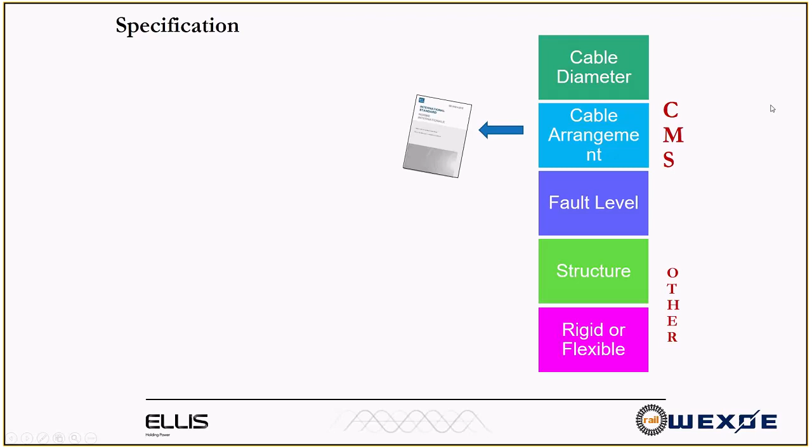So that's everything to do with the cable and what the cable attaches to, but also the environment. The environment is also very important. Is it going to be a marine environment? Are the cleats going to be exposed to sunlight? Is there a fire hazard? Are they going to be on an offshore structure, in a corrosive railway tunnel? Knowing the type of environment is also very, very important for specifying the correct material when you're looking at cleats. If we can get as much information as we can on that sort of slide, then hopefully that will lead to good specification, the project will run smoothly, and when the cleats arrive on site, they'll be exactly what the project engineers are looking for.

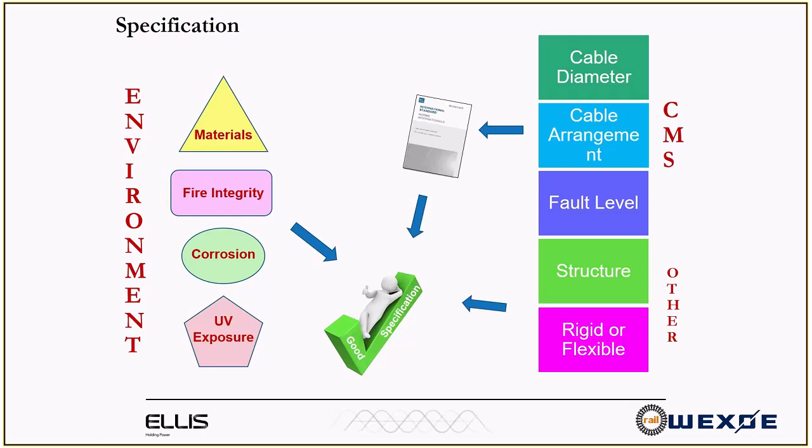Okay, on this slide here, you can see the IEC 61914 standard that I've placed in the middle there, and that relates specifically to the design of that product. However, lots of other things have to be taken into account when designing a cleat. I've briefly mentioned materials and corrosion, UV exposure, fire integrity, and I do realise that all of the numbers there relate to British standards, but there'll be a lot of other international codes and standards that relate into that as well.

So it's not just the product design, the metalwork, there's also the environmental issues that you have to take account of. I'm not going to go through each of these in a lot of detail because there's a time constraint, but I'm going to just give you an example of how corrosion and material selection is important, particularly in the rail sector.

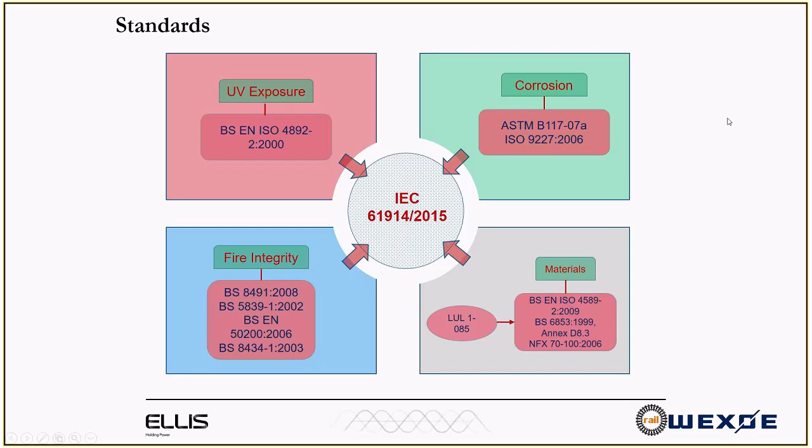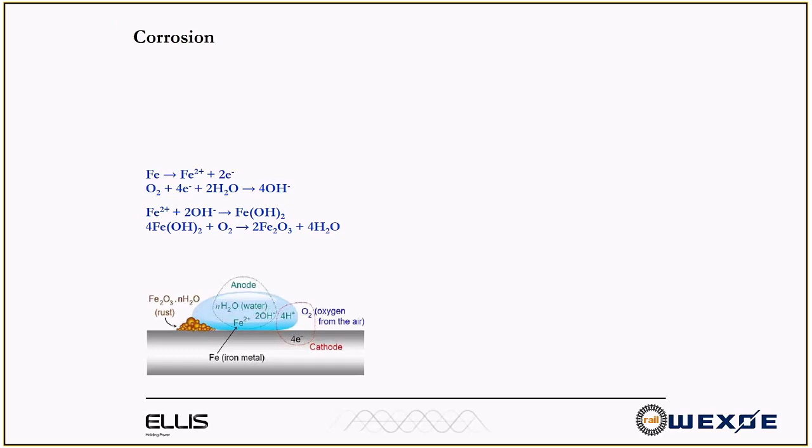You can see here I've put down the chemical formula, the chemical pathways for rust. This is iron 2 forming into what's called iron 3 oxide. So everybody's aware what rust looks like, and you may have experienced that on industrial sites such as oil and gas petrochemical refineries, there are hundreds and hundreds of kilometres of cables and cable management systems, cable containment, lots of steel work. A lot of it is galvanised, a lot of it might be stainless, but in certain conditions it will all be prone to the atmosphere and eventually to rusting, to formation of that iron 3 oxide.

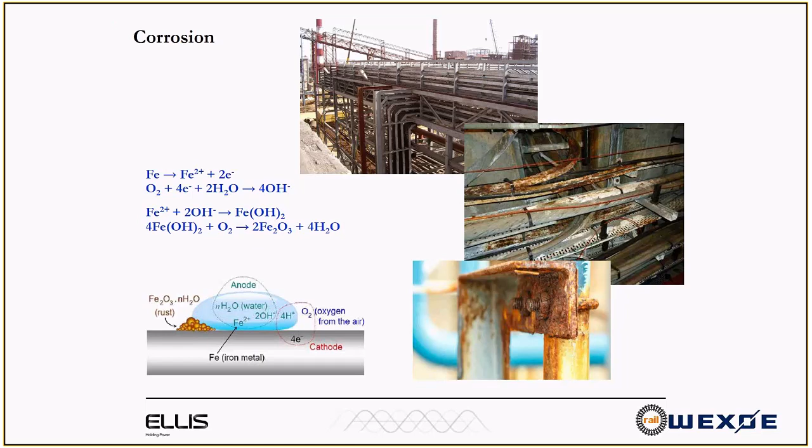So, another type of corrosion that you may be familiar with is what we call bimetallic or galvanic corrosion. This is where you have two metals that are dissimilar, and because of their position on what's called the electrochemical series, their level of activity, they can cause corrosion between the metals when they're in the presence of what's called an electrolyte, and generally that just means moisture or water.

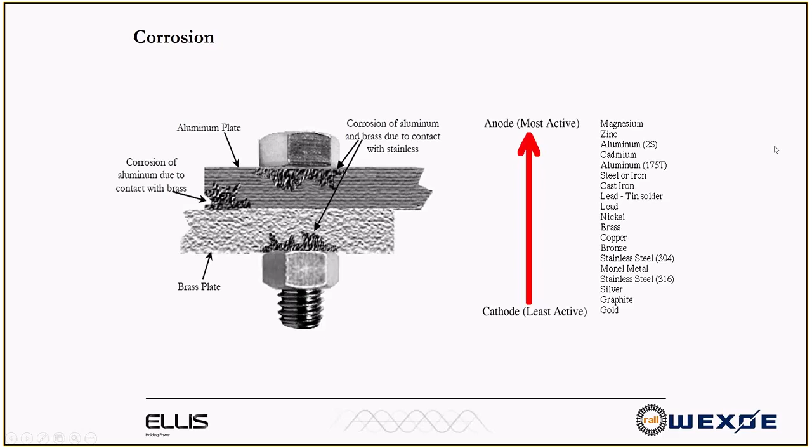So the further apart they are on this scale here, the more likelihood there is of corrosion between them in the presence of water. Here we've got brass and we've got aluminium. Aluminium's there, brass is down here, a reasonable gap, so there's likely to be corrosion. Here we've got stainless steel with brass, or with aluminium, an even bigger gap. So please be aware, with certain metals in contact with each other, corrosion can occur.

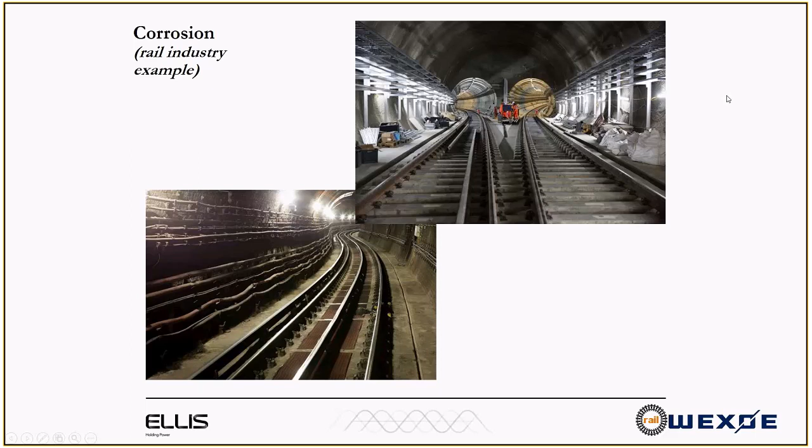So you might think in a tunnel environment that stainless steel would be a good option because it would last for a long time, it would be good at combating corrosive atmospheres, but you might be mistaken. And my point is, you have to take account of galvanic corrosion in railway tunnels. Train braking systems, when trains apply their brakes, the brake discs and the brake construction is generally made of cast iron or a fairly basic iron material. And when the brake shoes push onto those, you get a lot of iron dust into the atmosphere. And that iron dust will eventually settle onto a stainless steel surface.

So if you look where these sit in the electrochemical series, iron, cast iron around here, stainless steel here, there's a fairly big gap, and obviously railway tunnels are prone to moisture and water ingress, and therefore you're going to get accelerated corrosion. So in railway tunnels, try to avoid stainless steel and try to use powder-coated aluminium, which is probably the best. Powder-coated aluminium with cast iron, a very small gap, reduces the exposure to corrosion.

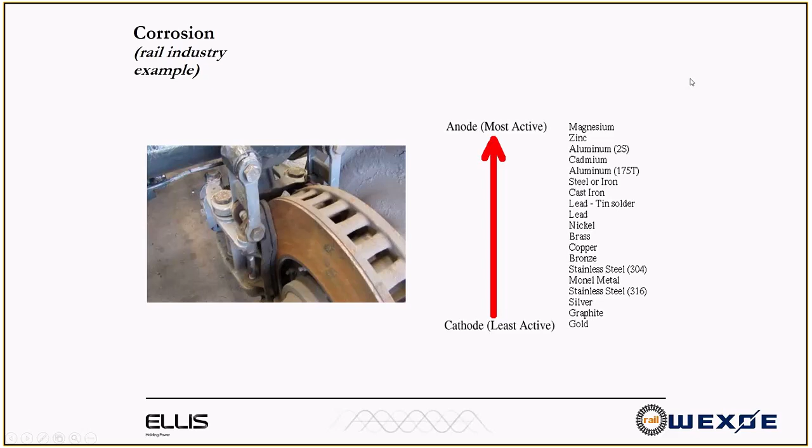Okay, I'm going to talk for 5 minutes or so about short-circuit testing and short-circuit fault levels, etc. This is why cleats come into their own. I said at the outset that cleats weren't very sexy, they don't do very much, but when short circuits arise, this is where the cleat and the strength of the cleat is very, very important. Short circuits occur for lots of reasons. It can be poor installation, it can be weather conditions, but more often than not, it comes down to human error.

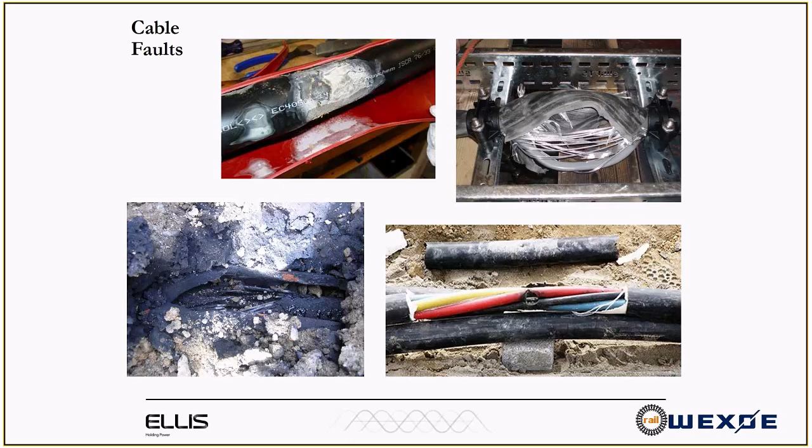This one on the left is what we call a catastrophic incident. So this is a three-phase cable, 11 kV, very heavily loaded, and this was a hydraulic digger. The backhoe of a hydraulic machine that went through this caused a very large noise and a big crater in the ground, so a very serious incident. But largely it comes down to human error.

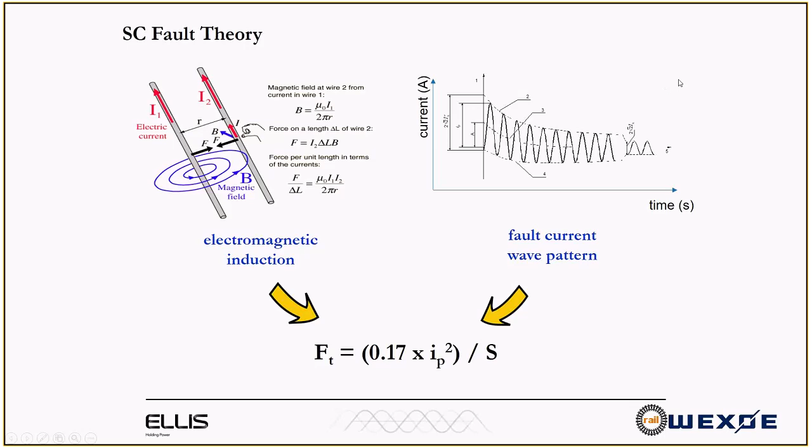And this diagram on the top right is a sinusoidal AC waveform, but just after a large fault has occurred. Normally it would be flat, like it is here, but in this case there's a very large jump in the peak current. Normally the peak current is √2 times the RMS current value. In this case it's about 70% higher, about 2.1 or 2.2 times RMS. So a much higher Ip value, and please note how these relate to this expression here. I've got some video clips that are coming along, and hopefully you'll be able to see how this formula relates to the video clips.

I've got three examples of three-phase electrical systems. Unfortunately, we can't do this sort of testing in the UK anymore, and we have to travel to the Netherlands, to Germany, to the Czech Republic or the US to carry out these tests. They're very expensive. They can be 10 or 12,000 euros per day, but we're a small company and we've so far carried out over 450, so we have quite a large database of information.

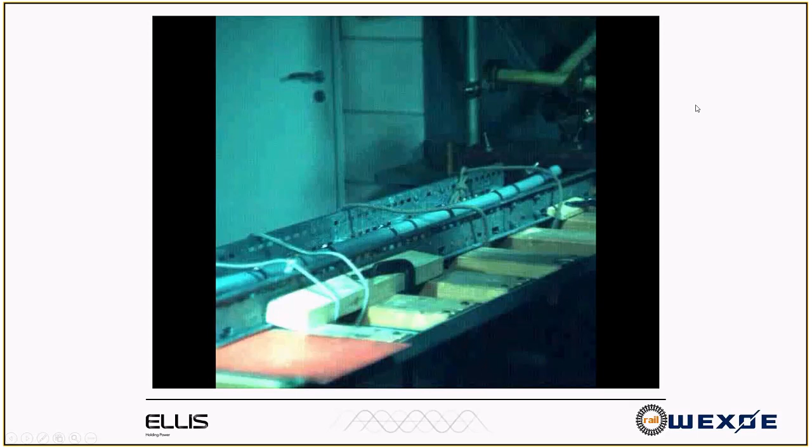I'll explain what you're going to see here. There's a common misnomer, an understanding that stainless steel cable ties are very strong and will perform the job that they're required to do. There is a place for cable ties that are made from stainless, and they can be very heavy duty and they can be very strong, but in some cases where you've got very high fault levels, they won't do the job.

What we've got here is a multi-core cable, so that's 3 phases within one sheath. It's on a test bed, and it's held every 300 millimeters with a stainless steel 19 millimeter cable tie. Very strong. This is a typical galvanized steel piece of containment. I think it's ladder. And over the top here you've got some ropes that are holding everything together on the test bed of large slats of wood. This is the generator up here, and this is the busbar down here. So a fault is induced at the busbar.

This bar along the bottom represents 100 milliseconds. So if you bear in mind how quickly that peak current occurs, which is 5 milliseconds, and the fault current in this case is 30 kiloamps RMS, so that relates to about 63 kiloamps as a peak. So I'm going to play this video for you.

There's no sound, which I apologize for, because these videos are taken by the test labs and they don't always have sound available. But if you ever get the chance to go to a short circuit test, please do. It's awesome. It's really quite exciting. Let's hope that this works.

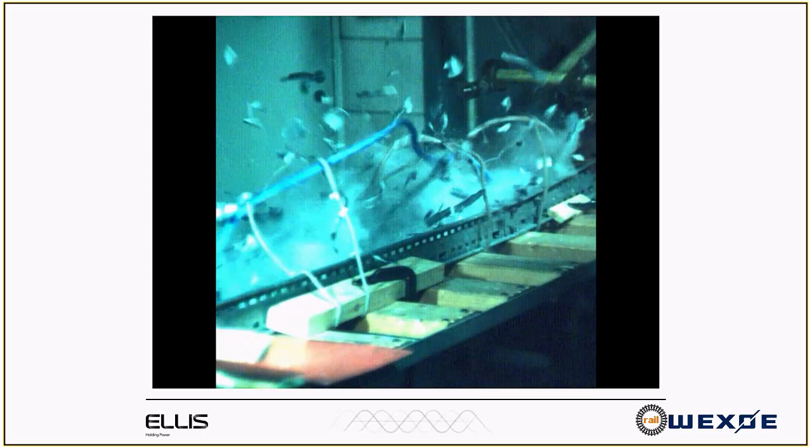There, 5 milliseconds. The stainless steel cable ties have been ripped off and that cable is severely damaged. You won't be able to use that one again, I'm afraid. The rest of the video is just lots of bangs, lots of flashes, lots of bright lights, but ultimately that cable has been destroyed. So that was very heavy duty stainless steel ties, and note how quickly it occurred.

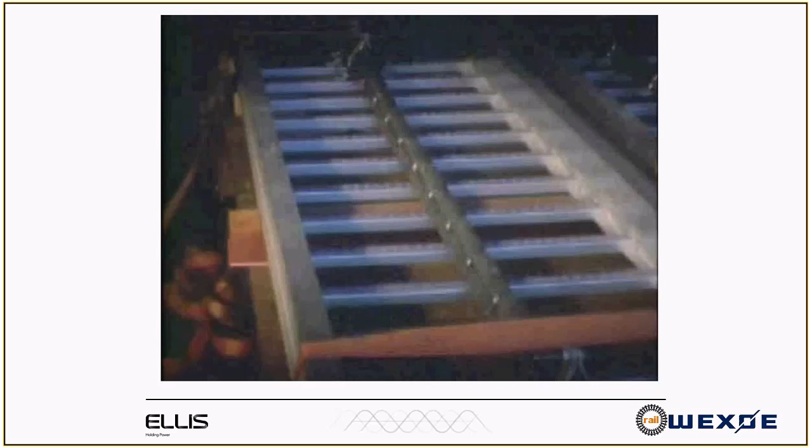Okay, let's move on to the second example that I've got for you here. Now this is a very good example of those forces that act between the conductors. Again, this is 3-phase, but the cables are arranged in trefoil. They're not multi-core, they're single cables in a trefoil arrangement. And again, these are spaced with stainless steel cable ties at 225 millimeters or 9 inches.

This is a real project that was carried out for an offshore platform in the Gulf of Mexico. So it's an American ladder, 9 inches separation, and the fault current on this one was 118 kiloamps peak. So this is a really good example of those forces. Again, the generator is up here and the busbar is down here, and the busbar has been concreted into the ground. So let's play this one.

It takes probably 30 or 40 milliseconds to get going, but you can see there how much energy is pushed into that containment, into that ladder, and the forces that are acting between the conductors. If you work those forces out in theory, they work out at nearly 6 tons per meter, so a significant level of force. And that was a demonstration to show the client that the specification for steel ties probably wasn't up to the job. So I can show you the solution to that one as we go through.

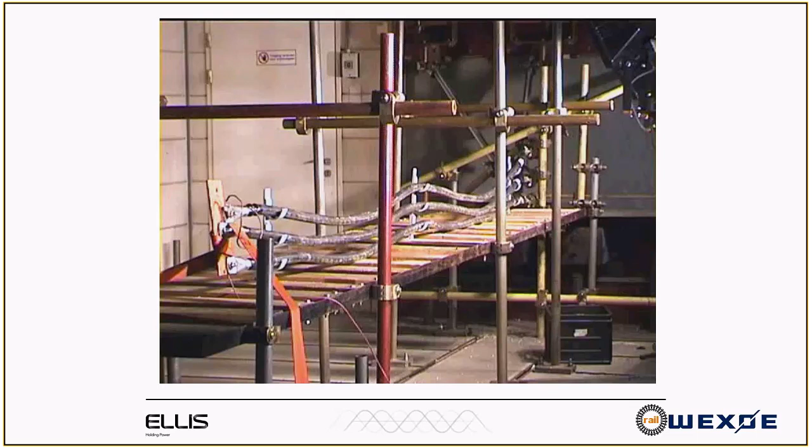I've got one more example, and this is quite a nice example because it's a very familiar sight in the railway industry. What we've got here is 3 phases again, and if you think back to that equation, you can see the separation between the phases is probably 120, 130 millimeters, so it's the biggest separation. The fault level in this particular example is only 40 kiloamps, so it's the lowest fault level and the biggest separation. So looking at the theory of the formula, this should be the least amount of energy.

A very typical sort of scene on railways. You see this for hundreds of kilometers in the UK for sure, and you can often see when the train slows down how many times the cable's jumped off the hanger. So this is a hanger rather than a cleat. Please keep your eye on one of these scaffolding type bars at the top here. Let's give this a whirl. Happens very quickly.

Happened very quickly. I hope you saw that okay, but effectively the top phase here has jumped off the hangers completely, broken the bar, and that could have been something like a signalling control or a points crossing control. So that will have taken a circuit out, and that would have caused a problem on the rail sector. So 3 examples, all 3 phase, showing you how that relates to that formula. I hope that made sense.

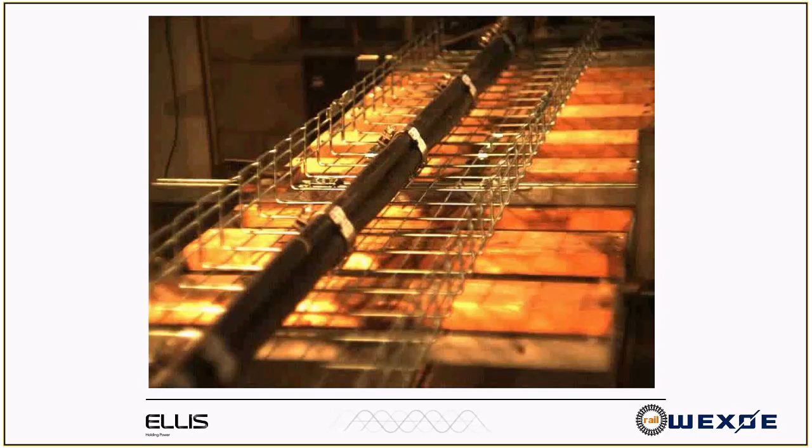I'm now going to give you just 2 examples of systems that have been properly engineered, and as you can expect, these are not quite as exciting, but nevertheless worth looking at. So what we've got here is again a trefoil arrangement of cables with cleats, fairly standard medium strength cleats, spaced every 300 millimeters on a stainless steel wire basket.

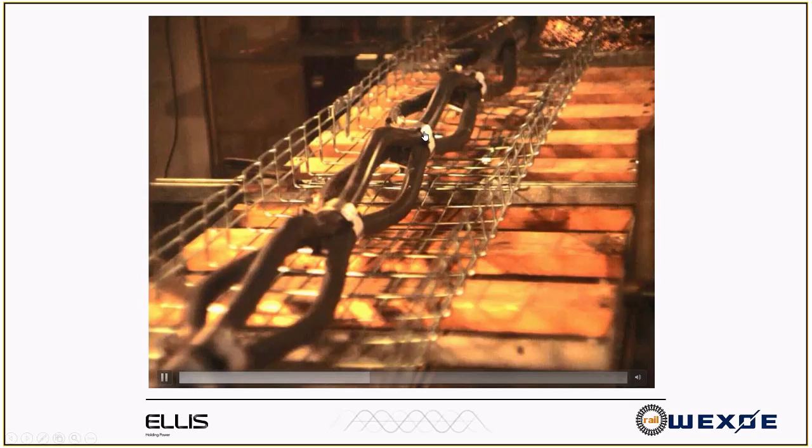Again, let's give it a play, and you can see here, happens very quickly, 5-10 milliseconds, the forces start to act. So the physics is exactly the same, the forces are there, but the cleats have been specified and designed to hold the cables in position. They are stretched. This is 2 millimeter thick stainless steel, and you can see there's quite a lot of stress being placed on these cleats. They are stretching and yielding, but effectively everything is staying pretty much where it should do.

In reality, what you would do if a situation like this has occurred is you would go and inspect the cables afterwards to make sure that there was no damage to the sheaths. With good quality cleats, you'd have a liner in between, so hopefully there would be minimal damage to the cables. But yeah, everybody would be happy with that one. The cables have withstood the short circuit forces, and nothing else has been damaged.

I've got one more example of a well-engineered system, and this is the solution to the Gulf of Mexico project. So this is exactly the same test conditions. It's the trefoil arrangement, 118 kiloamps peak, but here we've got fairly high strength cleats, and they're double the spacing.

So there's more than one solution to most of these situations. It's just choosing the right sort of level of equipment for yourself and for your project. And in this case, this was demonstrated to the client, and the client accepted that they had to rewrite the specification. It went out to tender, and we didn't win this project. It went somewhere else, but morally we did the right thing. Some you win, some you lose.

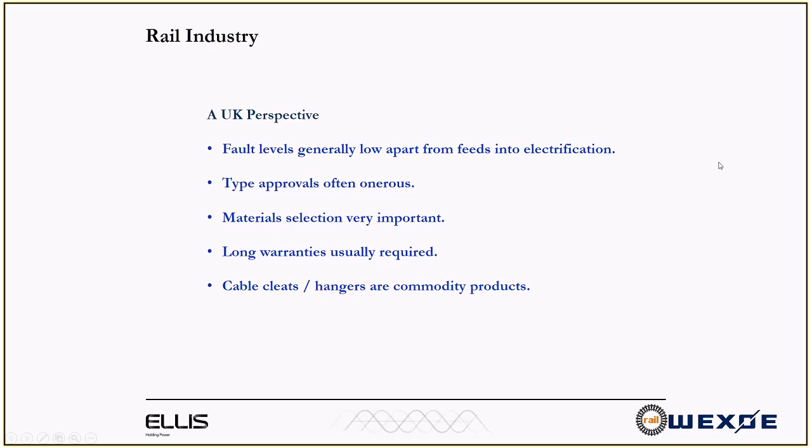Material selection is very important in the rail sector, usually because they want very long lifetimes, and also because a lot of the areas are quite difficult to work in, particularly in tunnels, quite onerous conditions. And in the rail industry, as it is with a lot of other industries, cable cleats and cable hangers are treated as bulk electrical commodity products. They're not gas turbines, they're not trains, they're not very sexy, and therefore they are low down in the tier level of contracting work. So commodity products, which makes it difficult to knock on the doors and to get yourself in front of people. But, okay, where are we?

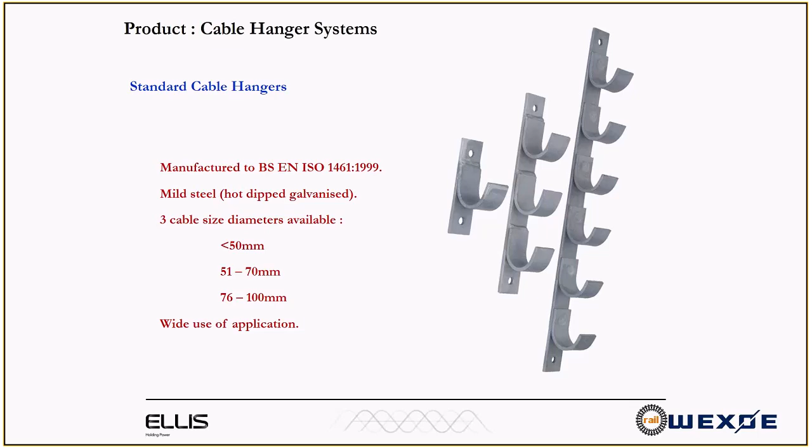Okay, so I'm going to talk a little bit more about the particular products that Ellis have and some of the projects that we've been involved with in the rail sector. I think you'll find this part quite interesting. I'm going to start with basic cable hangers. These are very, very basic products. They're manufactured to a BS code, that's 1461, mild steel, hot dip galvanized. I think the galvanizing level gives them a 40-year warranty at the moment, but we can do up to 60-year warranty. Available in 3 different sizes to accommodate cables from down to 10 millimeters up to 100. Very widely used in the industry, a cheap basic product, but we sell a lot of these.

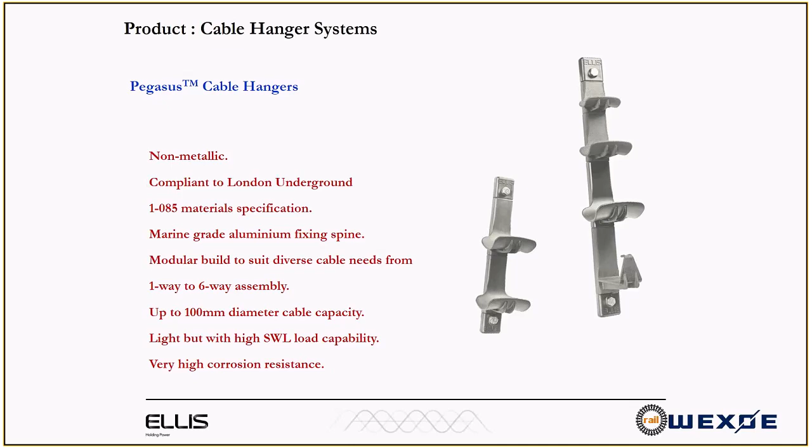Very simple fixing into any structures. We can have 1 bracket, or you can have up to 6, or I think we can probably do more than that if required. Similar capacity, up to 100 millimeters diameter for cables. Very, very light. A fraction of the weight of the mild steel hangers that I showed you in the last slide. This is a very light product, therefore much easier to install, and it has a very, very high corrosion resistance. We are quite happy to give 60-year warranties on this equipment. And we are starting to sell it. It's been a bit of a struggle to get there so far, but we are starting to sell it. And also we've seen this product go into other industries as well, mining and quarrying, for example.

It's been used a lot in tunnels and with the London Underground company, essentially where you've got tunnels with very old legacy cables which are not in good condition, that may be rusted or their fixings have corroded away. You have to be very cautious about removing these cables from the wall, and you'd rather not do that because sometimes you don't even know what the cables are supplying in cases we've been involved with.

So where you've got a delicate system of cables that nobody really wants to get involved with, these will give you a temporary solution. Again, these have been successfully used on the London Underground system.

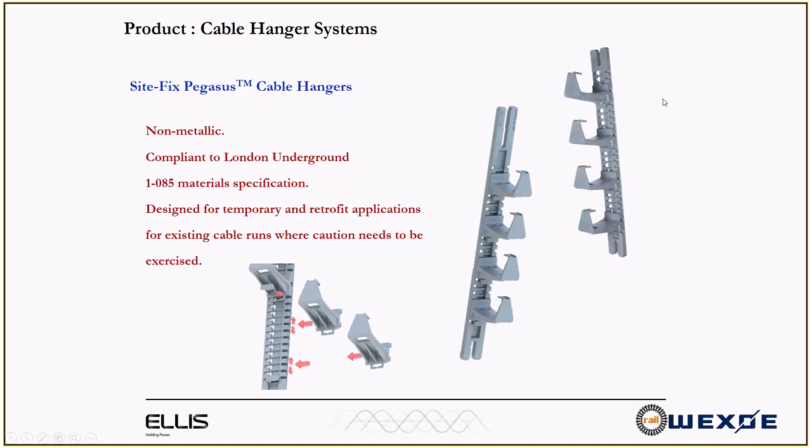I've got one more variant on Pegasus to show you, which is our profiled curved Pegasus. This is to be positioned in tunnels, and we can build these to a variety of tunnel diameters ranging from around 2.8 up to about 6 meters. It's exactly the same as the ordinary Pegasus, but it's just got this curving to it. So everything else is the same.

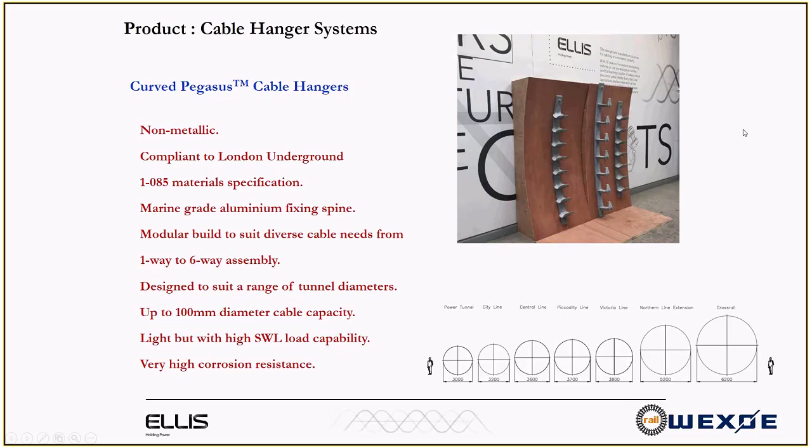Very high lifetime, very corrosion resistant, very strong, very light, very easy to install. We're getting involved with London Underground now to talk about implementing these onto some of those big £16 billion projects that I mentioned earlier.

I've got a little animation here. I'm hoping that this is going to work. This will just basically show you a little bit more about Pegasus. There's some background music, and hopefully you can hear that too.

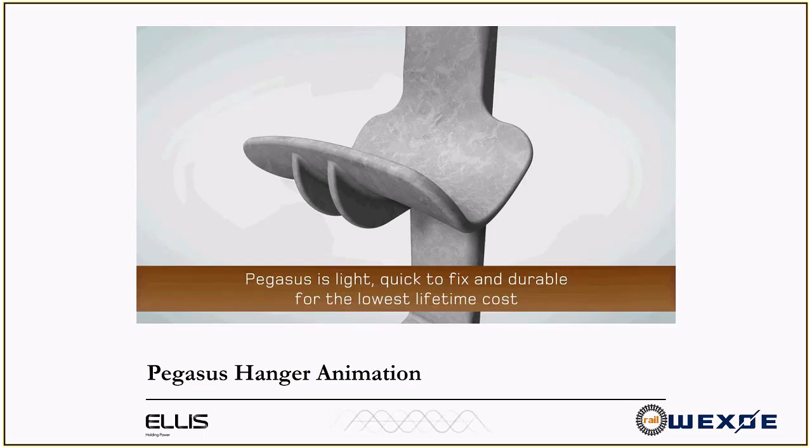Okay, thanks very much. I think that went okay.

Coming on to another product now that we have. This one is called No Bolts Cleat. It's not the most original name, No Bolts Cleat, but it has no bolts in it. We were quite flattered - Network Rail, the UK operator, came to us and said, could you develop and design a product for us that has no metal parts and requires no tools for installation.

This was all due to safety concerns, where contractors had been taking out existing cables, pulling live cables from studs, and the cables had been scraping across the top of the studs and going through the insulation, and a couple of contractors got quite badly hurt, burned. So they came to us to say, let's develop a new product.

It took us 18 months or so. But this product now is fully polymeric. It has no metallic parts. It requires no tools. It complies with IEC 61914.

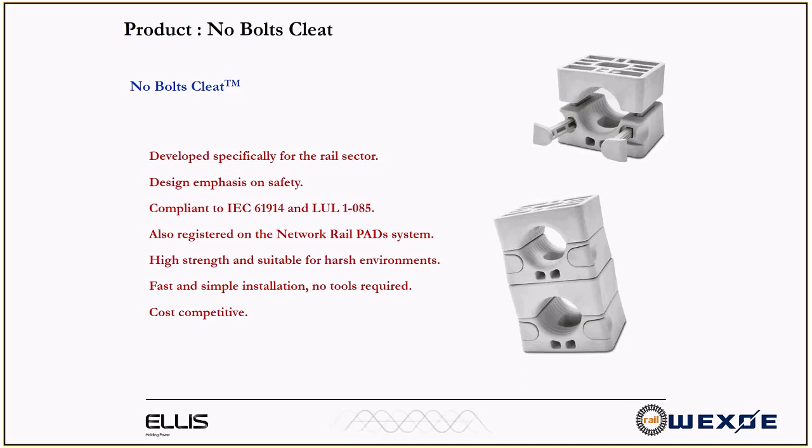It complies with the London Underground Material Specification, and it's also registered on what's called the PAD system, which is Network Rail UK national body's very onerous approval system. It took quite a lot of effort to get through there, but it's got through everything. Very, very high strength, very suitable for harsh environments, very easy to install and no tools required, and also cost competitive.

The installation contractor was absolutely very happy about this. I'm not exactly sure how much time they saved, but it saved them an enormous amount of time - possibly up to half, probably a 50% saving. And when you're saving time, you're saving money. Installation contractors, that's exactly what they want. So they were very pleased to be installing this particular product, and it went very well. So that's a real USP selling point for the No Bolts Cleat.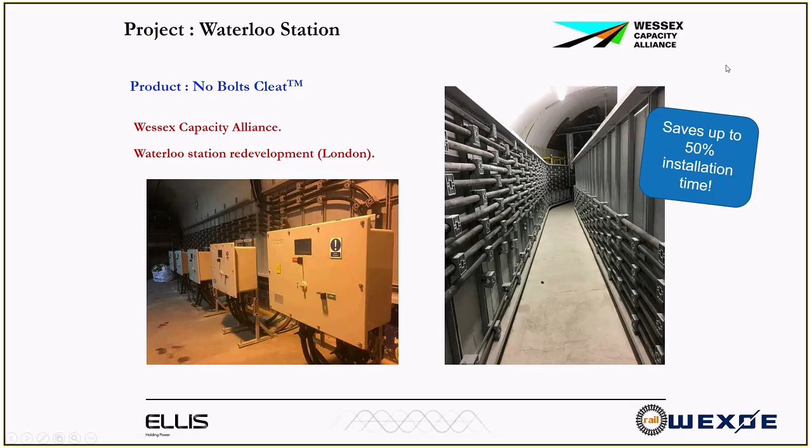And if I'm allowed to show you another little animation, I can show you one of No Bolts, similar to the last one. Hopefully there's some background music too.

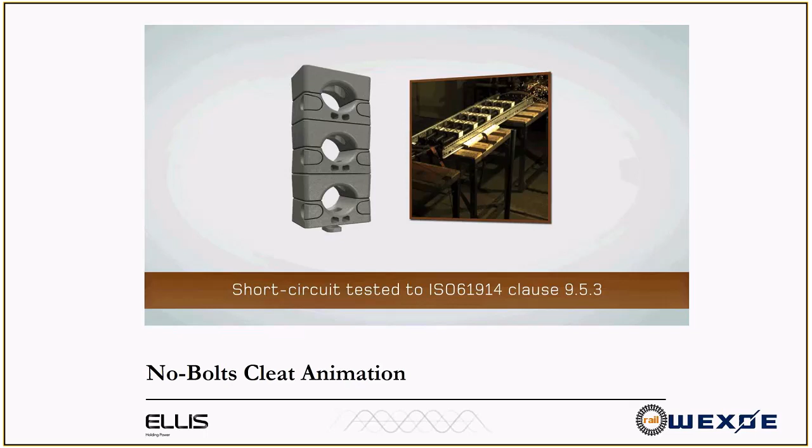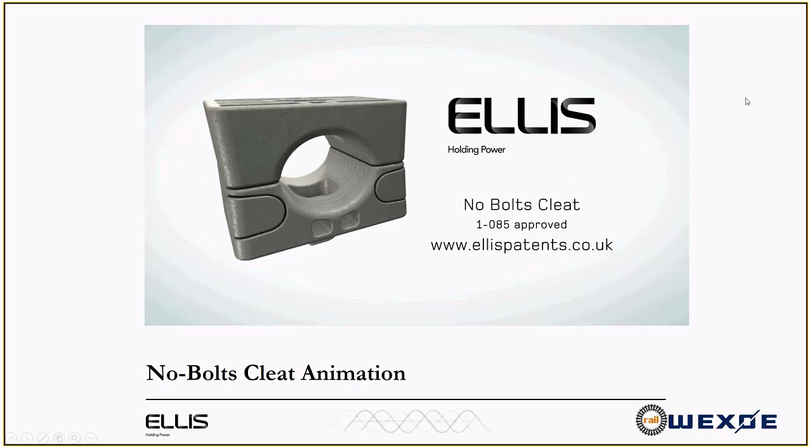Also, just to say, the No Bolts Cleat did win a national award, the Electricity Industry Awards 2016. So it's a winner, a champion cleat.

I've got a couple more examples to show you. This is some of the electrification work going on in the UK network, in very harsh environmental conditions. It's a tunnel, 7 kilometres, that runs under a marine estuary in the Severn Estuary near Bristol. This was being electrified at 25 kilovolts, and the environmental conditions are very harsh, with a lot of chlorides, sulfates, and other nasty chemical environments. They wanted something that would endure those conditions but last for 60 years. Even in this case, an ordinary stainless steel wouldn't have worked.

Aluminium, even powder-coated aluminium, was deemed to be a risk. So we went for fixing brackets made with super duplex, very high chromium content, with a traditional 2F clamp. So 3,500 of these in the Severn Estuary Tunnel, and we were very happy to give a 60-year warranty on those.

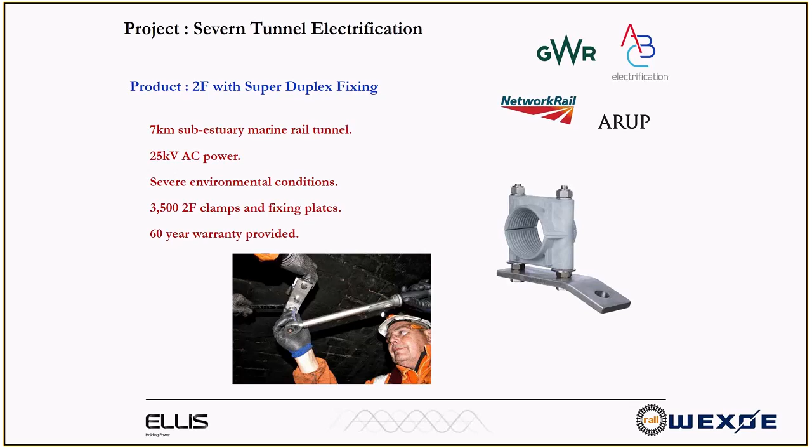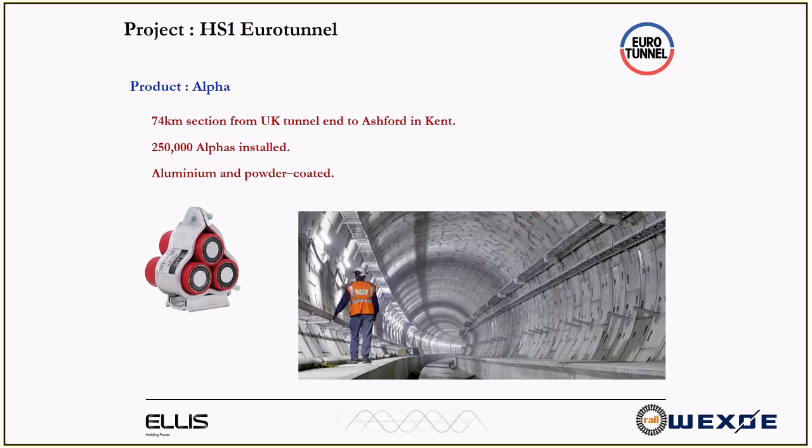I think this is the last example I've got of Ellis products in rail projects. This is the Alpha product, an aluminium trefoil cleat. This is HS1, High Speed 1, Eurotunnel, the approach from London to the tunnel entrance in Kent, in Dover and Ashford. 250,000 Alphas have been installed on Eurotunnel. They were aluminium and powder coated. I mentioned beforehand the issues of brake dust, etc. So 250,000 Alphas in the Eurotunnel.

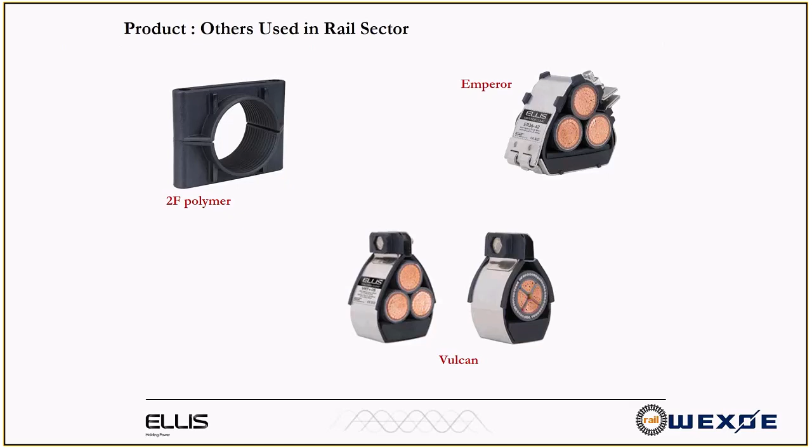We know of other products that are also used in the rail sector. As a lot of our products go through distribution through companies such as yourselves, sometimes we don't always know exactly where they've gone. But on the UK system, if you know where to look and take a picture, I can find you these products on the UK rail system also.